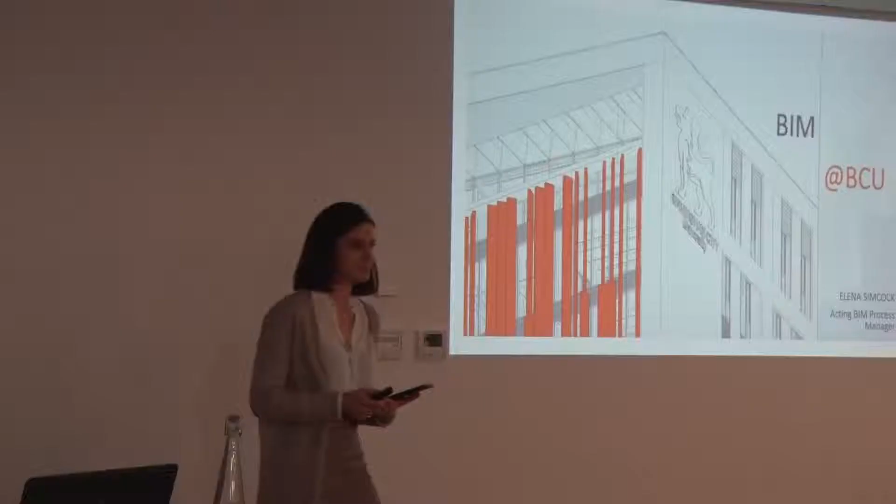Today to teach you a little bit about our university. I have been with Birmingham City University since 2016, initially as a BIM assistant.

2018. And I'm also joined today by Chris Johnson from Willmott Dixon Construction. Chris has worked with us on our capital scheme, so he's really well familiar with our information requirements and will be able to give you a very good insight of what it takes to deliver those in the field.

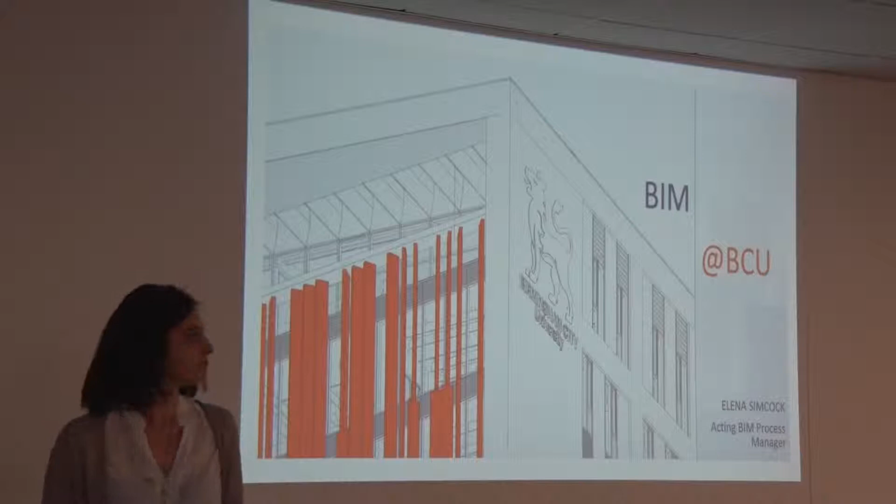Okay, so just to start off with a little bit of an introduction of our timeline, where we are and where it all started. So the university has been on its route to digitizing its construction and facilities management database since the mid-90s, with an early adoption of a reactive maintenance system, essentially a ticketing system. That was followed by compilation of 2D space data across the estate in 2004, and our first official BIM scheme opened in 2013, the Parkside building, which is the home of the Faculty of Arts, Design and Media.

What we consider to be the landmark of our development is the Curzon scheme, which was opened in 2015 and then later on extended with a phase 2 project by Willmott Dixon in 2017. So following the Curzon building, the university embarked on an intensive phase of development, working on 3 capital schemes simultaneously, delivering BIM on all 3, as well as a developer scheme, opening the doors to the Birmingham Conservatoire in 2017.

And as you can see on that timeline, we started quite early on in the process, and we have an extensive BIM database, and the process was still evolving, so British standards and documentation were still being developed as we were already working on our journey.

What we're working on now is Steam House 2, which is a building spread over 11,000 square meters, a mix of educational, commercial, and incubation space. Stage 3 of the project is about to kick in with a scanned survey, a 3D scanned survey of the Belmont Works factory facade, which was gutted by fire in 2007.

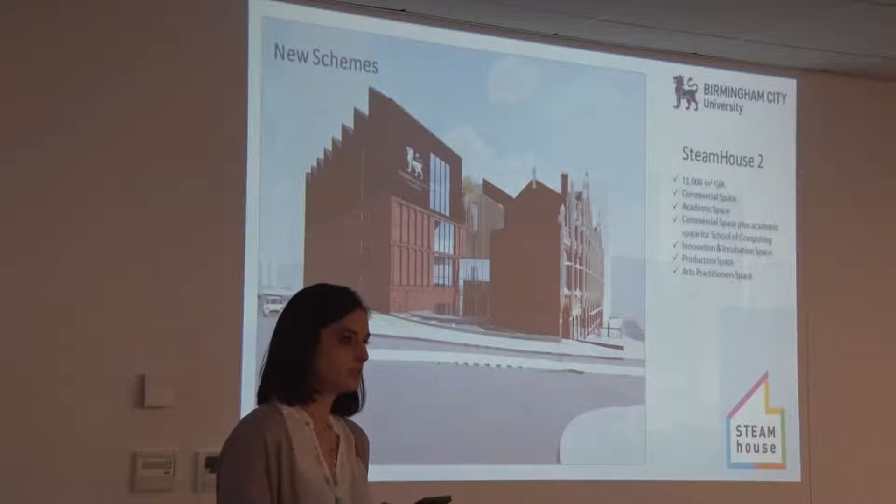We're focusing on the information delivery plan very strictly on this project, as well as roles and responsibilities to improve visibility and transparency. We have also got a new classification system that is now fully aligned to the SFG 20 maintenance standard, introduced by the Building Engineering Services Association.

So a little bit about why we do it. There are many reasons why we would want to build information modeling on our project. But above all, the university has a long-term interest in its facilities. As such, we're interested in the management of the whole life cycle of information. And we're interested to do this in a sustainable manner.

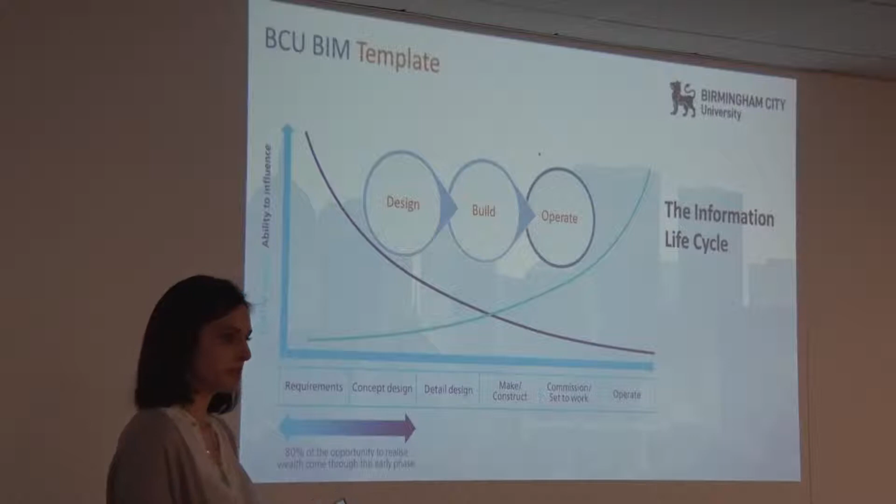We are interested to reduce the amount of information or the overproduction of information by sharing it centrally between the teams. We are also interested to reuse the same information that is used to design the buildings, to construct them, and then later on to operate them.

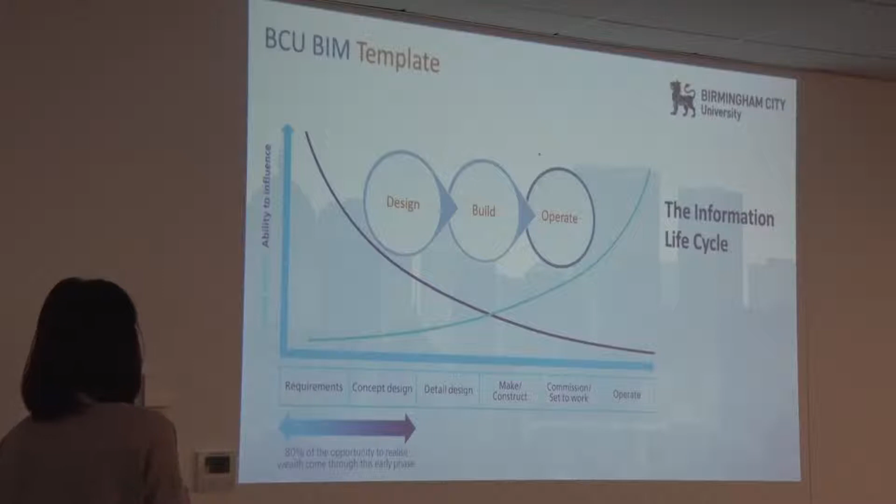And we are also interested in seeing that whole process being recycled during operations by reusing the same information and completing the cycle. And what we would like to really see is the ability to influence the design positively early in the process at minimum cost and with maximum impact.

So when talking about building information modeling, well, a building information model is a pretty complex model, and it consists of all kinds of data sets. In a way, we view building information modeling as a complex system that allows us to link different kinds of data sets, and a complex information system requires complex information requirements.

So looking at the building information model, a client needs to really think about what it is we would like to receive at the end of the job. Is it just a 3D model? How would you like your asset information to link to your 3D model? How would you like your drawings to link to the 3D model?

Well, what about testing and commissioning certificates and operational and O&M literature and documentation?

Then we look at the second aspect of building information modeling, the how question, the modeling question. How is all this information going to be produced to give us consistency between projects, but also accuracy throughout the database? This is by implementing a specific process that needs to be followed, and also following some standards. So we're now looking at the new ISO BIM standard and what elements of that would suit our template.

And the final aspect we need to consider is the management aspect of BIM. It really is taking responsibility about who is responsible to produce what kind of information and when.

So a complex information template needs quality controlling. It is a complex system, and setting out information requirements should only be done in a measurable way. There is little point setting out and asking for information if you're not able to verify that information. Bad information is worse than no information at all, and it may be the case that a spreadsheet is better than a complex, poor quality BIM model.

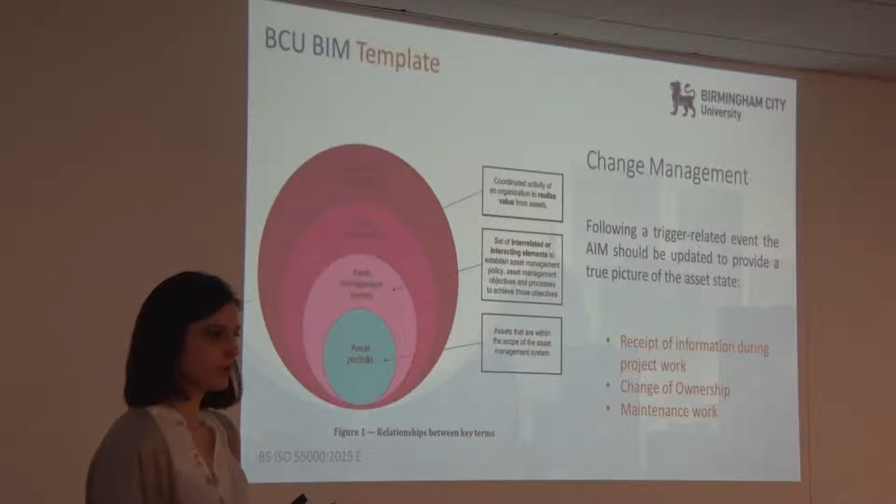Another aspect we need to focus on, touched briefly by Hadir, is change management. There is little point working on receiving rich BIM information if that information is not going to be maintained during operation, and there are many challenges with this. It is something I have been focusing on in the last 6 months in particular. An asset portfolio is at the heart of any quality facilities management template, so it is essential to maintain it during operation.

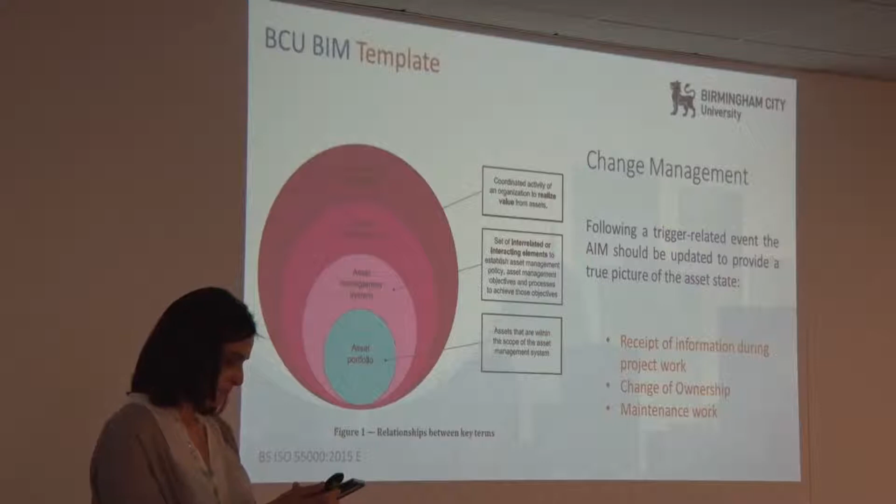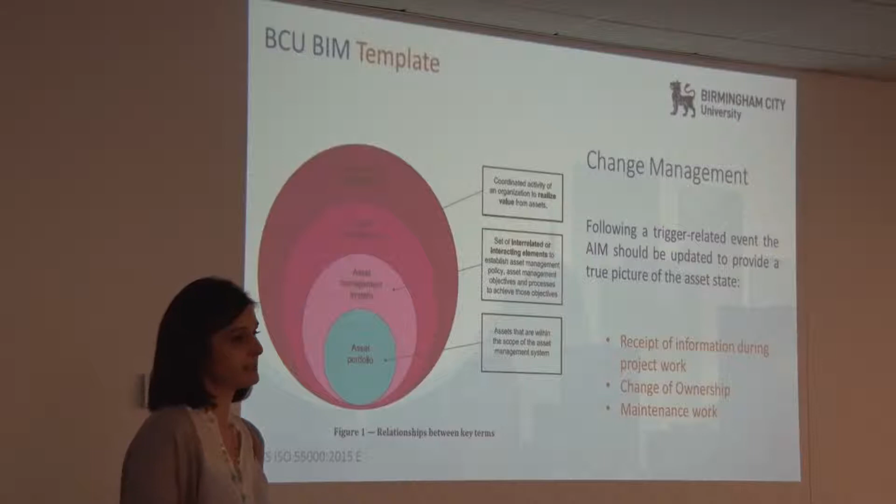So the way we do this is by making our models available centrally on the cloud to be accessed by delivery teams. We use our teams to update our models whenever we do a refurbishment, but the models are not necessarily used to drive change. Our teams would always go and measure on site. What is essential to us is to maintain a quality database that is reliable at any one stage of a project.

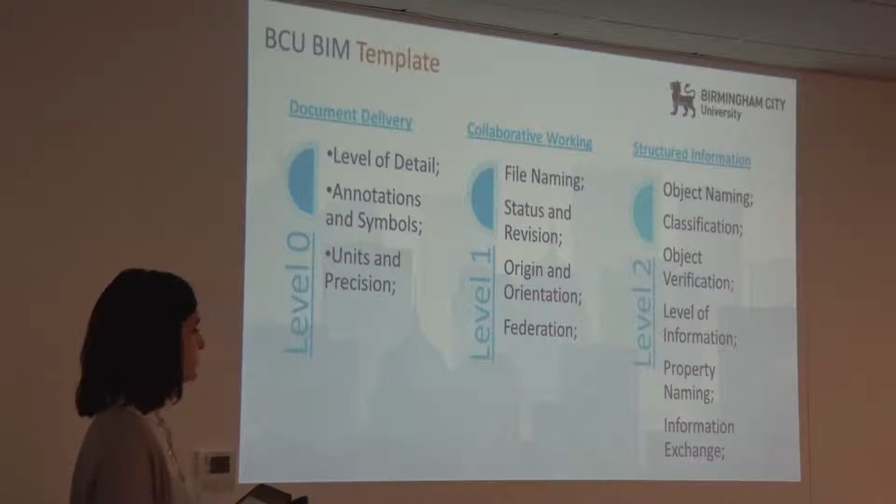So just a brief pause to introspect here. We've heard talks about BIM levels and what they are, and pretty complex templates. But what we really need to focus on is what those templates are aiming to deliver. Focus on the outcomes at the start.

I'm pleased to say my understanding is that the new ISO standard does not reference anything similar to BIM level 0, so the industry has matured. We're now broadly working at BIM level 1, where we're able to work collaboratively and share information, and we're really moving forward towards BIM level 2, which is to deliver that information in a structured and meaningful way.

Just to finish this part of my presentation, I recently did a comparison chart of where we are in terms of the industry standard and how we differ. Although we are very broadly along the lines of BIM level 2, because we started our BIM development so early in the process, before the standard was well established, our template does differ from the industry standard, and there are small changes.

We require native design files, so we receive our information as Revit files. Our drawings are limited to those files so that we can maintain them easily during operation. We use NRM3, which is not the ISO implementation of a classification system in the UK, but we find it really helpful when we get that data into facilities management.

Yes, we use SharePoint as well to store our information, with a combination of BIM360 to store graphical data.

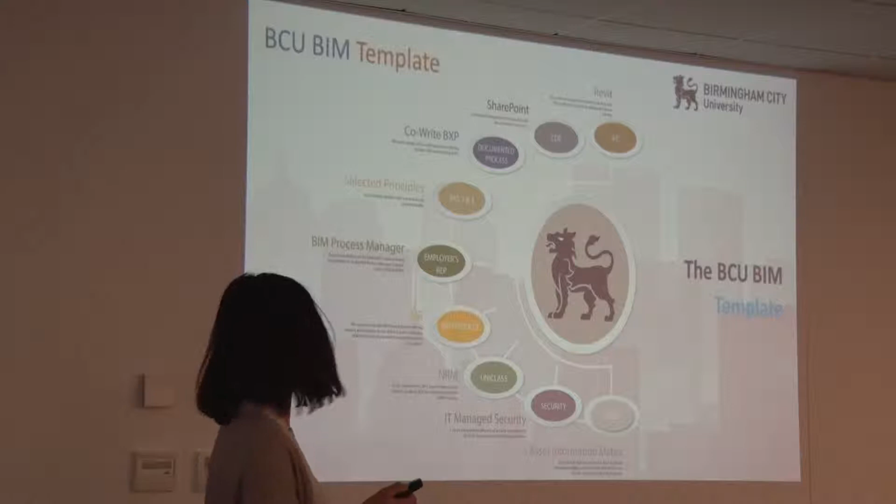Having completed five capital schemes and receiving a lot of rich BIM data, the university did not have a computer-aided facilities management system. So last year we procured Concept Evolution, which is a BIM-compatible platform.

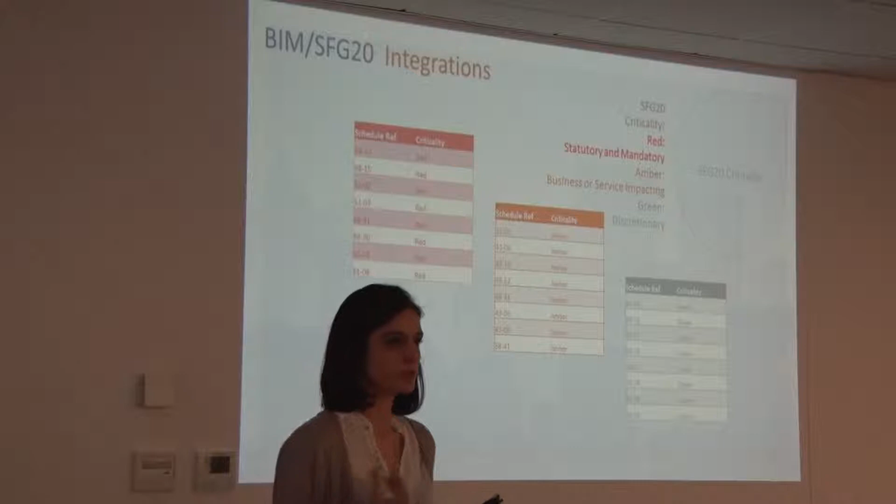Integrating and rationalizing our data has been a big challenge for us and has taken a lot of our time. When talking about integrations, we have to demonstrate that we are compliant as a client in terms of plant preventative maintenance, and the university uses the SFG20 standard, which you may be familiar with. Very broadly, those are plant preventative maintenance schedules grouped based on criticality, with the red schedules being those we need to comply with to demonstrate compliance. There are other schedules that have an impact on business and service, and some are discretionary.

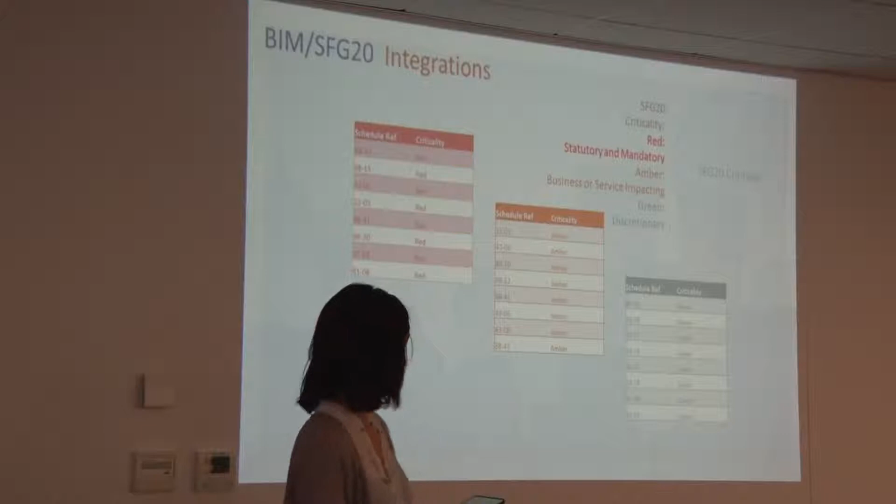Part of our integrations and taking our BIM data from the models into CAFM required aligning with the SFG20 standard, and the way we achieve this is by using NRM3.

Very broadly, NRM3 is structured in levels. At level 1 we see groups of elements. Moving on to level 2, we see building elements, which are then broken down into their systems, and components and specification at level 4 and 5.

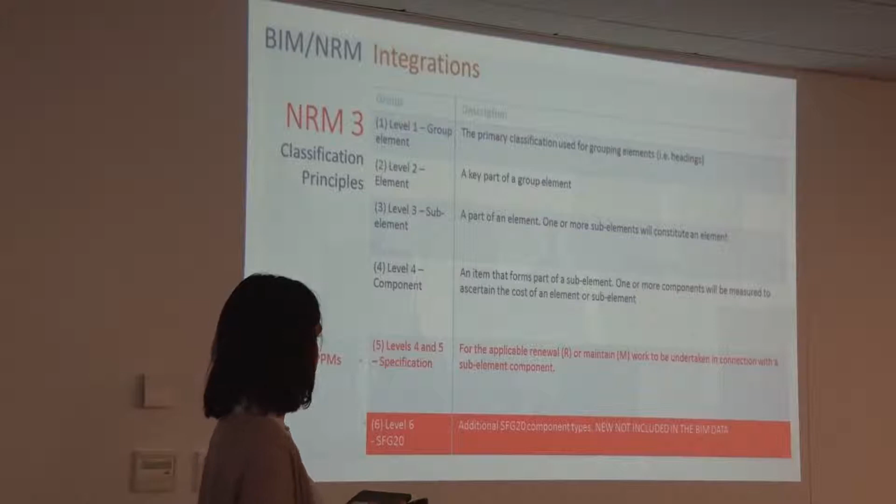What we did recently is extend our classification table to NRM level 6, which was introduced by BESA. BESA aligned their SFG20 data to NRM, and found that the classification system needs to extend further to pick the right PPMs for our assets. So we revised our NRM tables in order to comply with it.

Looking at integrations, our priority was to create a digital twin of our BIM data that we can take from our native design files into our computer-aided facilities management system, and exchange data between the two bidirectionally, so we can maintain designer information in the design models and facilities management information in the CAFM system.

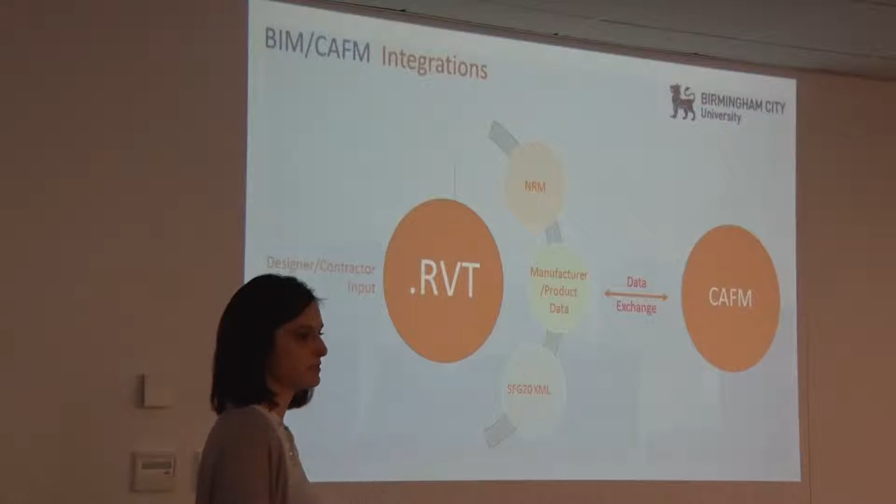When talking about information, we talk about NRM in terms of classification and how we group our objects to be meaningful to our operational teams, and also a lot of manufacturer literature that comes from our Revit files. All of that is linked to the SFG20 XML, which also goes into the Concept FSI.

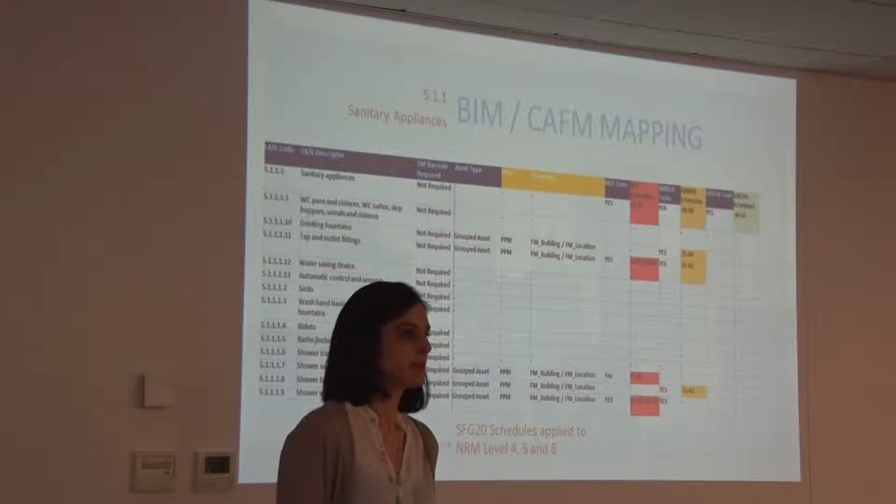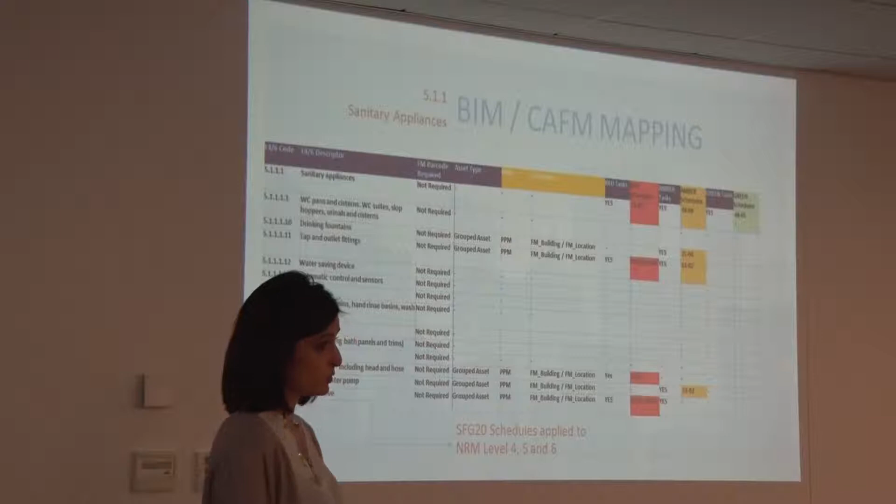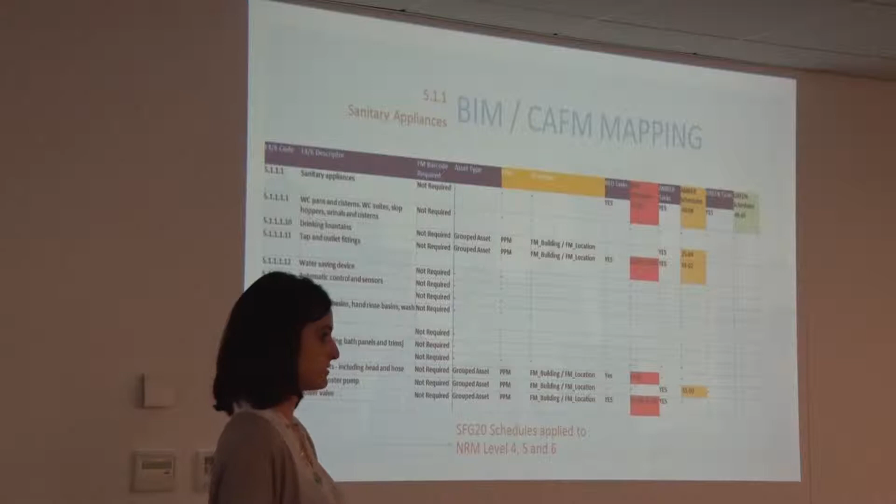I worked closely with our operational teams in creating a CAFM mapping template to help us get our assets into Concept in a meaningful way and cut out all the junk that can come from a BIM model. We used NRM to specify our asset types and identified 4 types: grouped assets using model data such as location, distribution board number, fire rating, etc., depending on how engineering would like to maintain the buildings; individual assets, if an asset needs to be listed individually regardless of other criteria; and parent and child assets. We went through the complete NRM table, classified our assets, and linked that to SFG20 scheduling.

We started with our Curzon building, and Chris will talk about that later. We were able to take our asset information from the models and run a dry test for our CAFM integration, to see how this data starts to shape up and make sense in a meaningful way. We can see the grouped assets identified in one of our buildings, the number of model objects, the locations they're spread on, and the NRM categories they belong to.

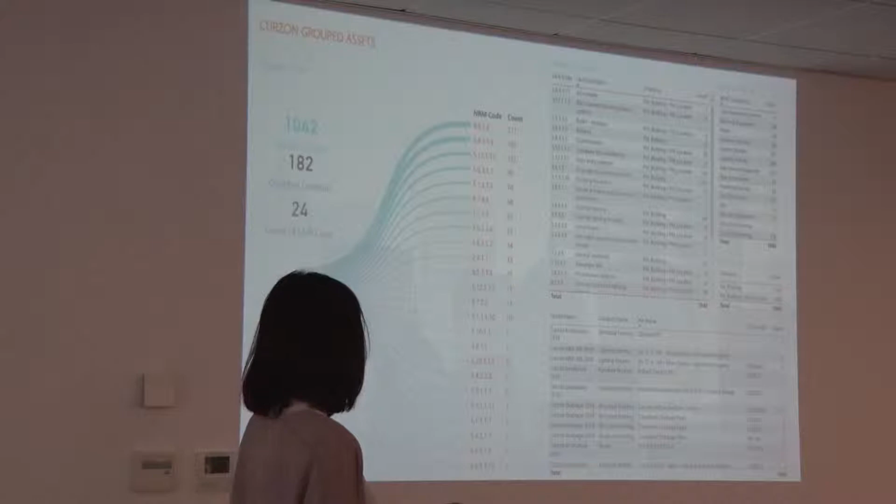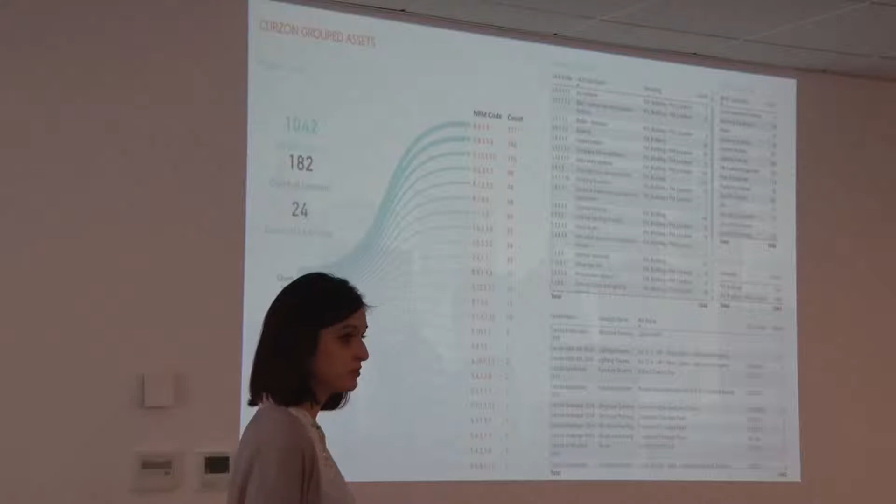We can see where these assets are coming from, what they are, and a lot of operational data associated with them. We can start heat mapping our information as we add our buildings and look at the different systems that come from our models and how those compare from one building to the next.

Our aspiration is to be able to link our data to our BMS, as well as energy consumption data and our sustainability criteria. We can do so by location as well, and start really studying and understanding our buildings.

Before I hand over to Chris, I'll leave you with this diagram. This is the story of our current building, and it illustrates how we use classification to demonstrate what we need to maintain for compliance. What we can see here is NRM level 1 objects - building fabric, services, externals, finishes, furniture, fitting and equipment - the rough categories, broken down into their systems at NRM level 3, and then going into sub-component and specification at level 4 or 5.

All those assets at the top are not assets we're interested in for planned preventative maintenance. We'd still like to know what they are so we can understand our buildings, but what we really need to focus on is the maintainable assets at the bottom, and that's how we use classification and our model data to help us achieve this. I'll hand over to Chris.

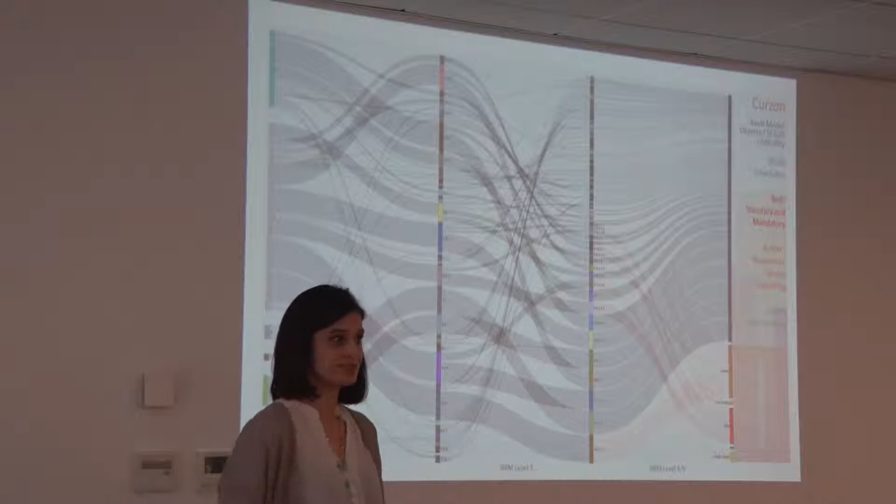Thank you very much, Ali. I'm here today to give a short case study on delivering these requirements across several projects, and some of the lessons we learned throughout developing these deliverables on 3 projects. My name's Chris Johnson, I'm Digital Manager for Willmott Dixon Construction, heading up the digital team across our Midlands region.

As a company, if you're not familiar with Willmott Dixon, we are a £1.5 billion turnover main contractor, and we have passionately embraced BIM. We've mandated it across all our projects in our region, and we're really trying to upskill our business to become a digital business for the future.

A very quick, brief introduction to the projects. We started off working with Birmingham City University back in 2012 on the Parkside building. It was very early back then - I don't think PAS 1192 Part 2 had even been released at that stage, so the team had developed their own standards. Interestingly, those standards closely matched the principles being done in the PAS, but some details weren't using quite the same classification systems.

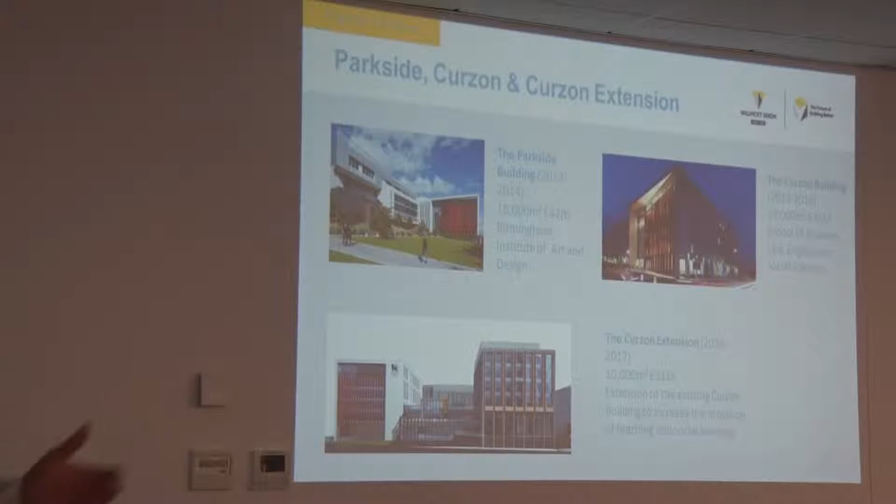All these projects were 2-stage tenders. We were then awarded the Curzon building in 2014, which is quite a large facility - a £46 million facility. Then in 2016 we were awarded the extension for Curzon there.

Right at the very beginning, we first started working with consultants together in a 3D modelling environment. What's absolutely commonplace now on a lot of projects wasn't happening commonplace back then. But there were a lot of advantages to having all your consultants working in a 3D modelling environment - quickly realising where there potentially are errors in that design right from the start, and designing around the other consultants' information, saving a lot of reworking. We get better coordination, but there is a bit of an impact, and I suppose we're only really starting to understand it now.

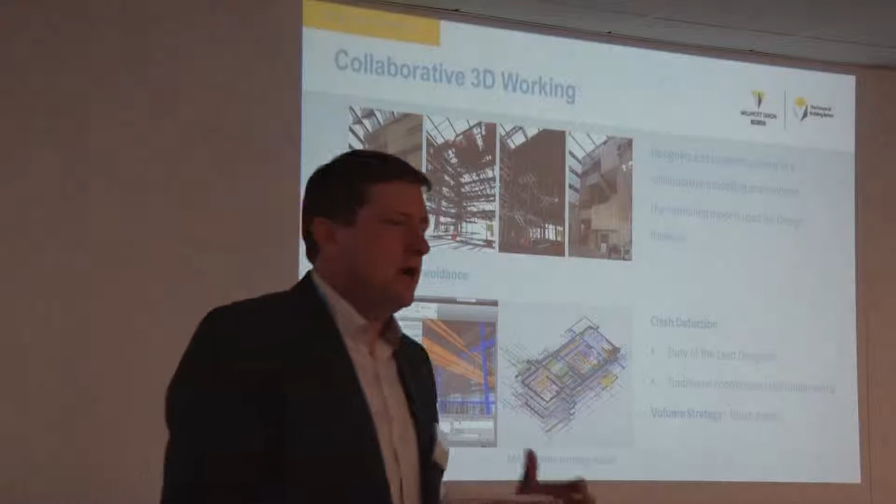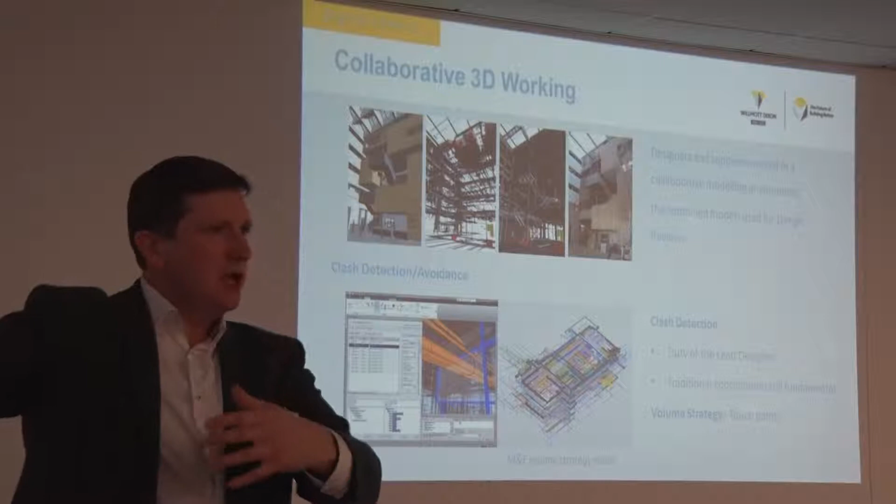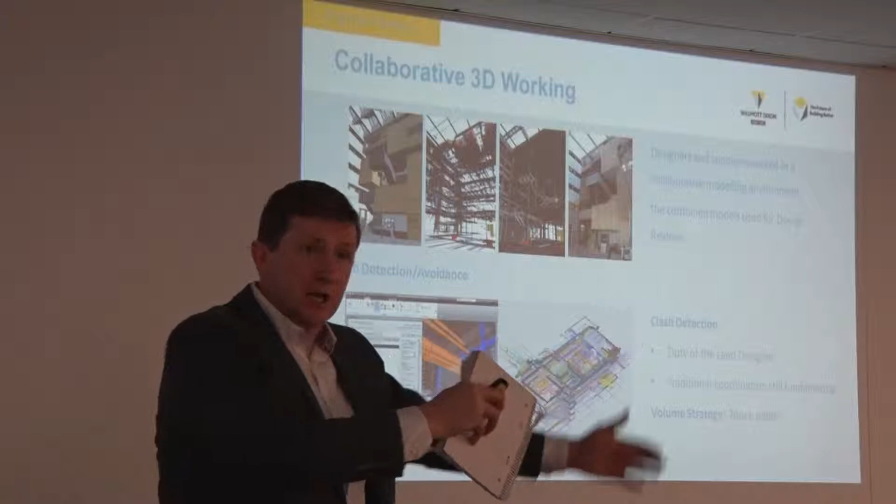By working in a 3D modelling environment, you realise very early on when another consultant's design is going to have an issue. So all those potential problems that would come out of the woodwork later on, maybe during construction, get resolved at the front end of the process. It pushes a lot of the workload profile for the designers further forward. Work they used to do during stage 4 into stage 5 is now being done earlier in stage 3. It's fantastic for us as a main contractor because we get more robust information for pricing, but for a client, you may have to invest more at risk before going out to planning. So it's worthwhile being aware of that.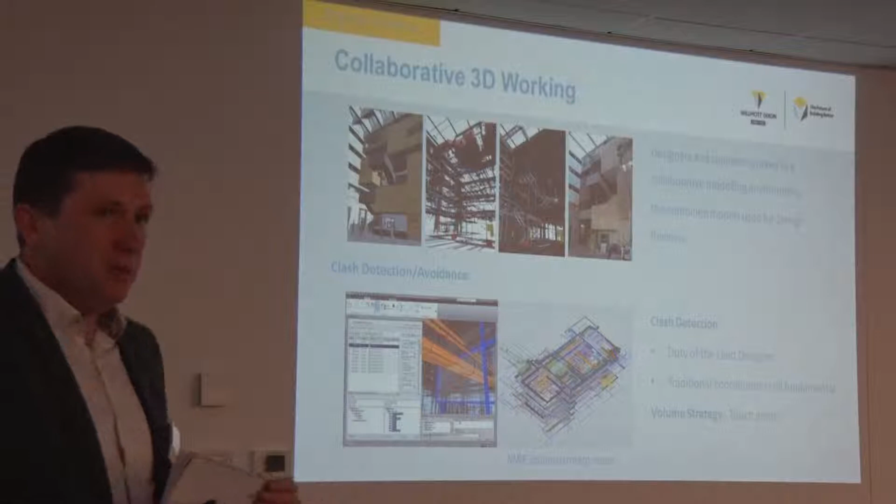Something we tried very early on, on the first phase back in the Parkside building, was that once you've got all your models together, you can start doing clash detection and automate the process of identifying where there are issues. The first time we did it, we were a bit naive. We threw all the models together and clashed everything against everything. We ended up with 50,000 clashes on our project. We couldn't even open the clash file. It was a major headache.

We very quickly became aware that traditional coordination processes still need to be done on a project. Clash detection and automated processes don't replace the traditional processes that a lead designer and design managers do. It just captures those things that used to occasionally slip through, so we end up with a better set of design information on site for construction.

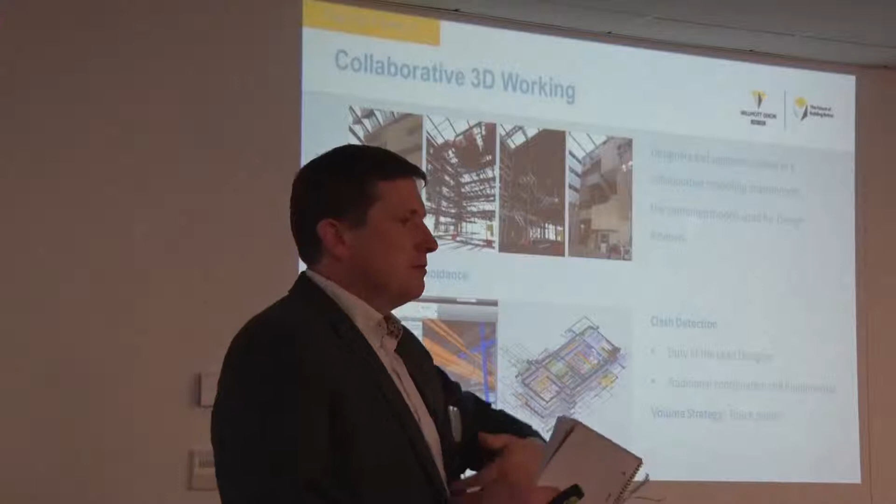The other thing we tried very early on, and haven't really done too much since but are starting to look at more, is clash avoidance. Rather than getting to a point where clash detection is very reactive—you design something and clash it against something else and then know there's an issue—with clash avoidance the idea is setting out a strategy right at the start of a project, allowing spaces for people to design within.

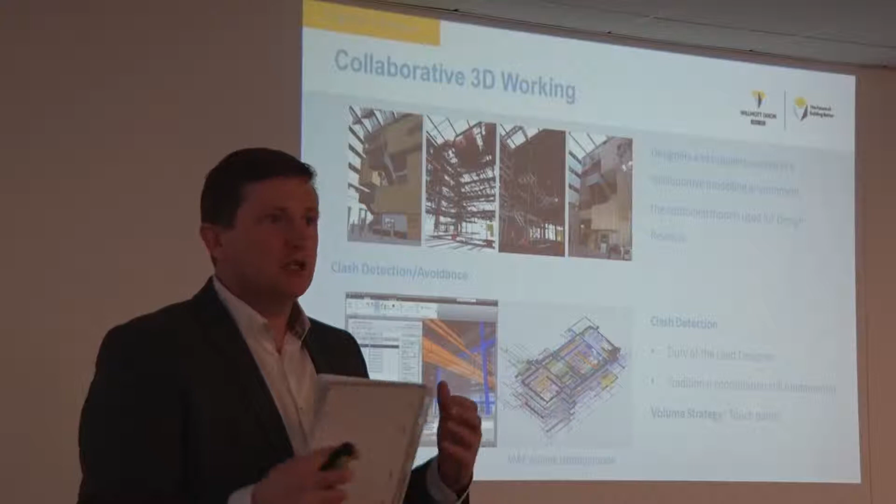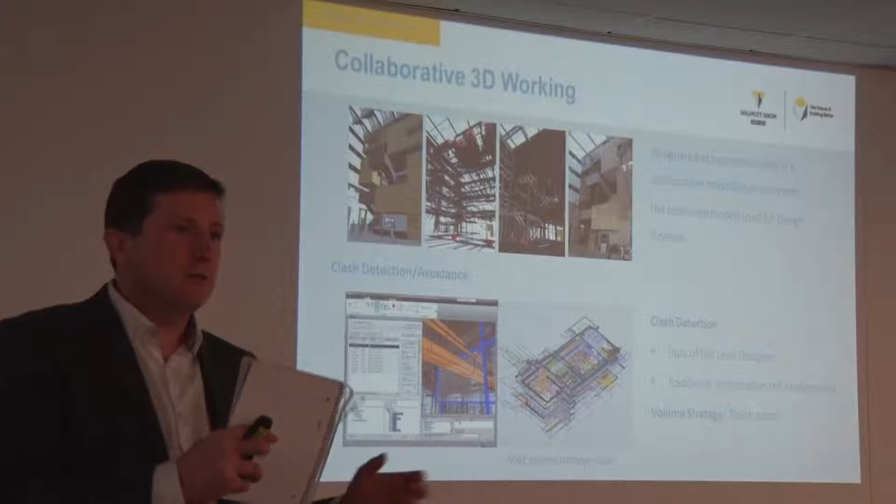So that they can avoid clashes right from the outset. We actually started it on the Parkside building—or the Curzon building, I think, I can't remember which one it was—but it's something we haven't really embraced as a wider business, though there were a lot of lessons we could have taken from that job. The idea is you give a zone for M&E services, and whenever a steel or something like that goes through that zone, it's very quick and easy to pick up as a potential issue. So you're giving spaces for people to design within. It's actually come out of the automotive industry, and it's been in the British standards, but nobody seems to be doing it on our projects. It's something we still need to look at and spend more time working on.

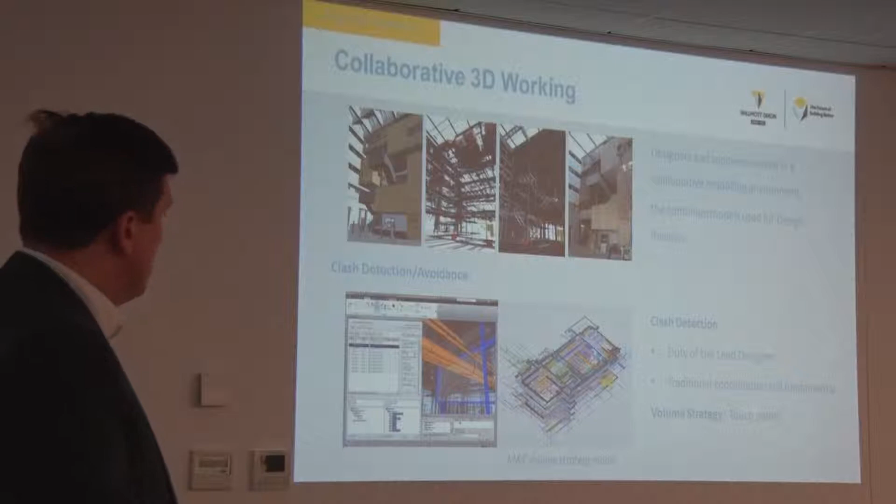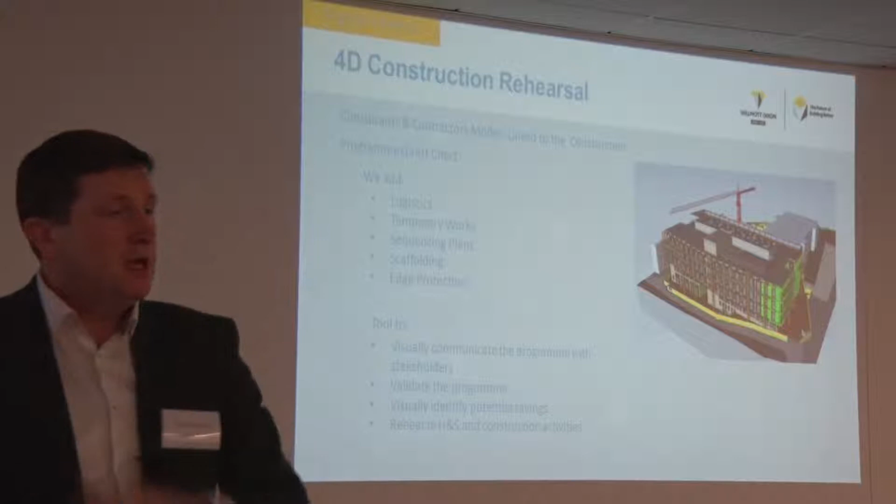Once we've got those 3D models from the consultants, we can pass them over to our construction team and use them to better inform our processes about that project. We take the consultants' models, add our logistics models and temporary works and so on, and link that to a Gantt chart. We simply take the objects, link them to the tasks in the program, and play through that program—it acts almost like an audit.

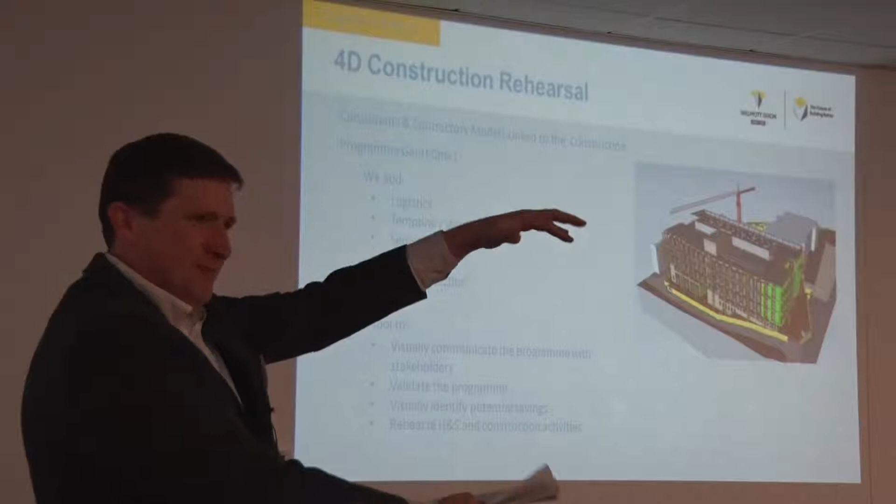If you've got a lot of objects left over after assigning them to your program, you know you've missed a lot of tasks out. Or when you go through the actual construction simulation, you can quickly see that doesn't make sense—like a ground floor slab going in after the columns are already up. Those things that may not be easily evident in a very large program with tasks are much more easily seen in the context of a construction simulation.

Now we've actually been using it as more than just a communication tool. We're starting to use it as a rehearsal of the construction program.

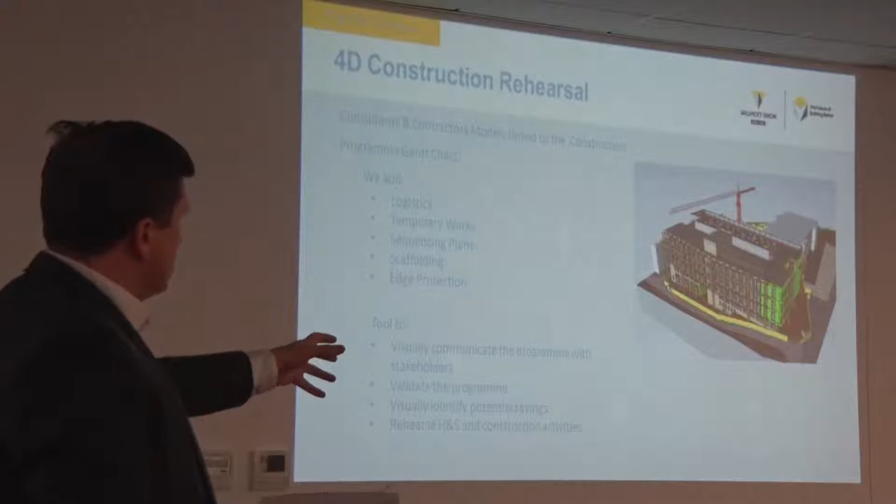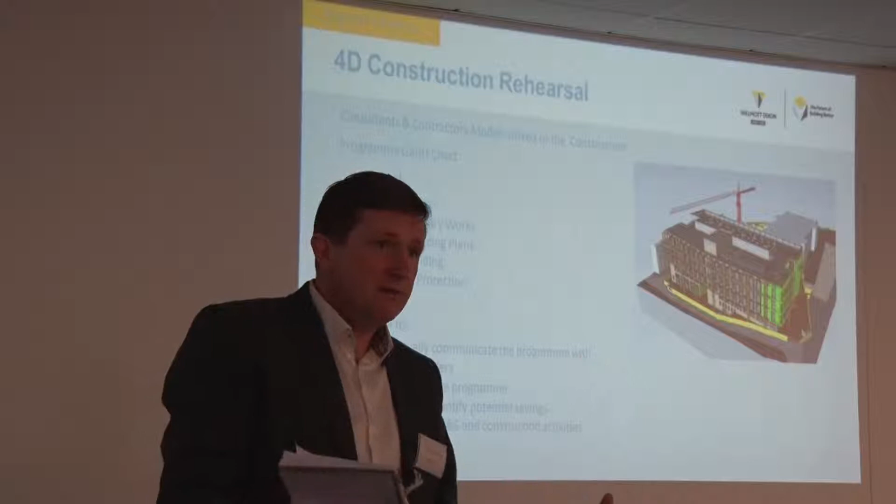Taking a construction manager, sitting in with them, going through this construction rehearsal, task by task, talking about the activities happening on that task, and they can very quickly see all the context of all the other activities and potentially unconsidered things or health and safety considerations, etc. So we're starting to use this rather than a construction simulation as a construction rehearsal tool, and it's really useful for that.

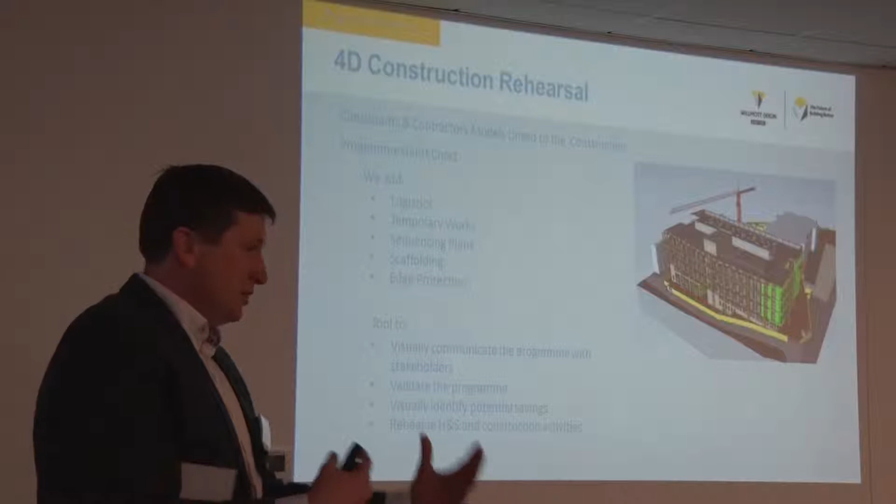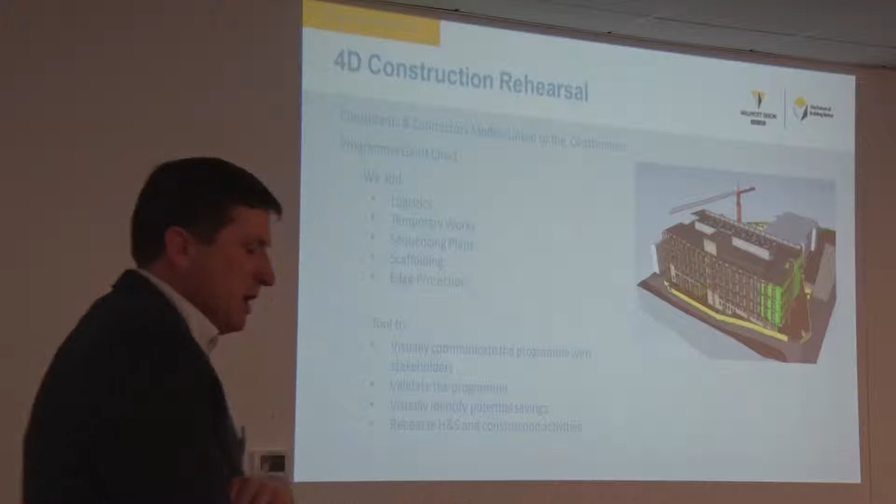So for some of the things that come out of the woodwork, on the phase 2A or the Curzon extension, we had mast climbers going up, scaffolding going round, and very quickly we could see - it was very visually evident what wasn't evident in plans. At certain points in that program, it was going to clash with the scaffolding and those mast climbers weren't going to work. So we had to quickly come up with a new strategy. It's those kind of things that come out with that rehearsal.

Now, this was an interesting point - after we handed over, I'm just going to look at a couple of key things here today because it's a very short case study.

One thing that came out of handing over the first phase of the BIM information to the Birmingham City University estate team - one of the team members asked our senior design manager, how do I know it's correct? Which is a very good question, because Chris Kimman, our design manager, has been working on projects for 30 years, said well, I've never actually been asked that in the last 30 years.

So what happened on the second phase was that we were asked to undertake a point cloud scan to compare the actual install against the design intent. So we got an external company in, they did 2 scans - one of the structure, when the services, the above and below ground or below floor services were exposed, and then we did a second scan of the completed facility. We then overlaid them, went around and looked at a lot of different software that you could do comparisons with.

And we quickly came to the conclusion, at least at that stage, it was just as easy to do it visually - mark up where those potential variations were and send them back to the consultants to get them to update their information, to make sure we could get an accurate set of as-built drawings and an accurate as-built model. Because, as customers, you're going to be using these models for the next 50 years or for the lifetime of that facility, you'd want it to be accurate.

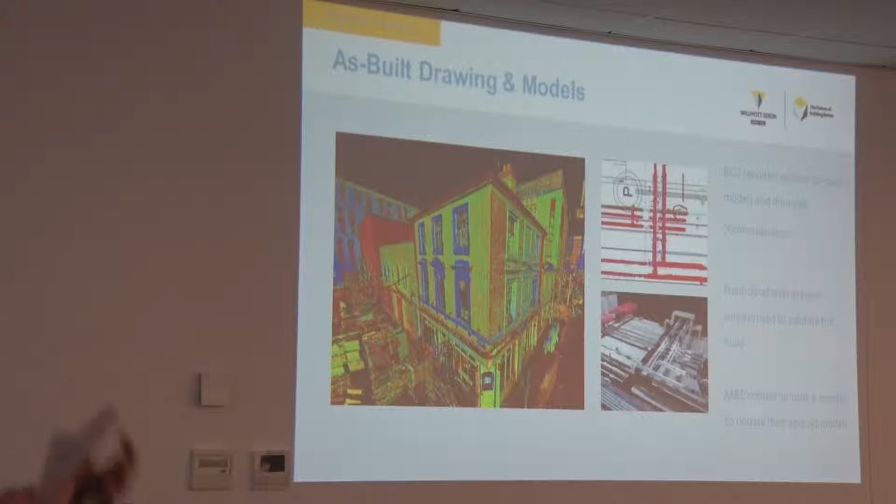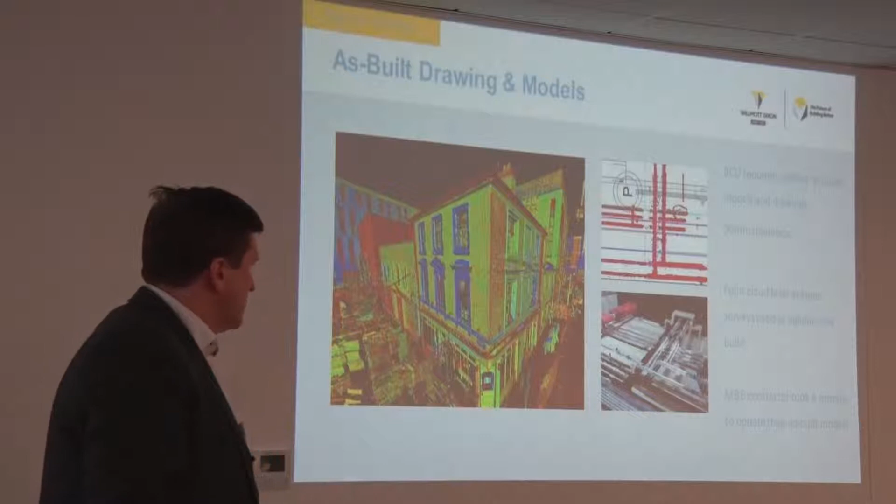Now, while we instructed the M&E main contractor, they of course also have tiers of subcontractors that work underneath them as well, and that message about having to build within up to a 50 millimetre tolerance had never got through to those lower tier contractors. So an interesting lesson, I suppose, for us.

So by the time that we got on to the third phase and also onto the extension, we'd spent quite a bit of money going out to a consultant to get those point clouds. In fact, it was as much money as buying a point cloud scanner ourselves, so we could start doing that process ourselves, having some of my digital engineers on site and start scanning as we go.

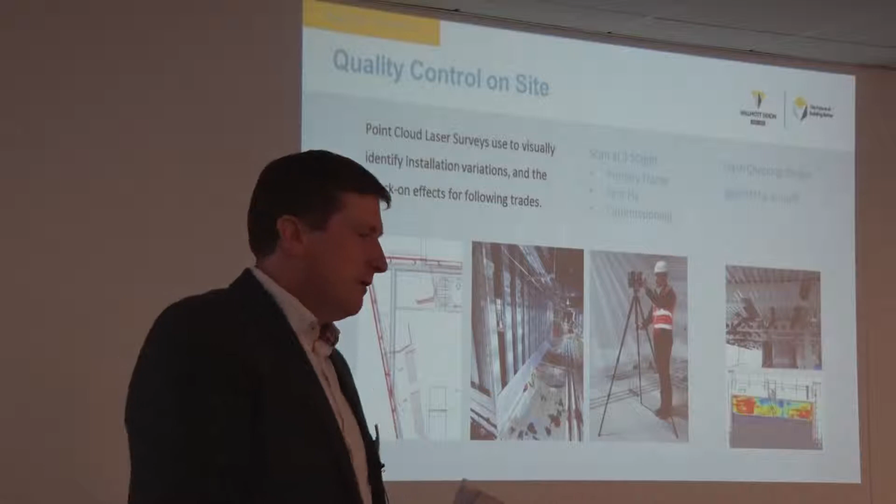Now, something we hadn't really occurred to us, but of course, scanning as you go allows us to then quality control our supply chain partners as they are doing the install. So, a partition will go through, we'd do a point cloud scan, drop it over the Revit model, and quickly see where there were variations and where there were problems.

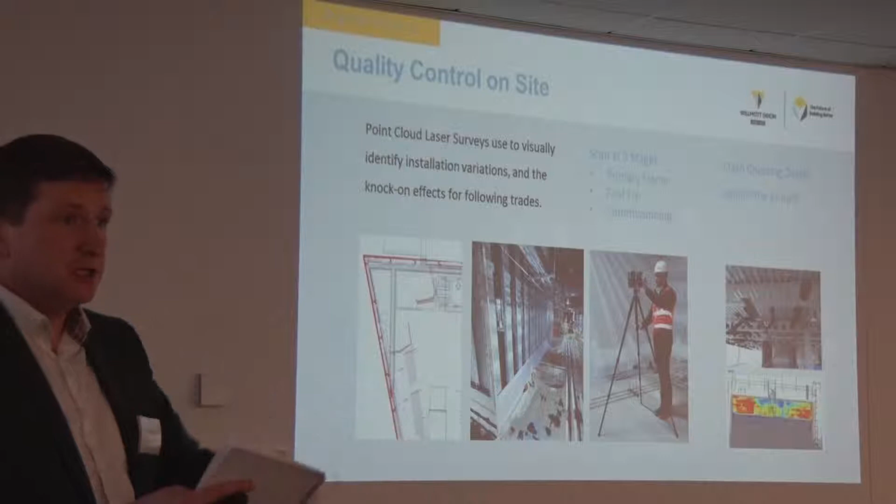We'd go back to the architect, associated architects. Where possible, they would incorporate them in the design and update the design information, reissue the drawings again for the following trades that were going to come along onto the job.

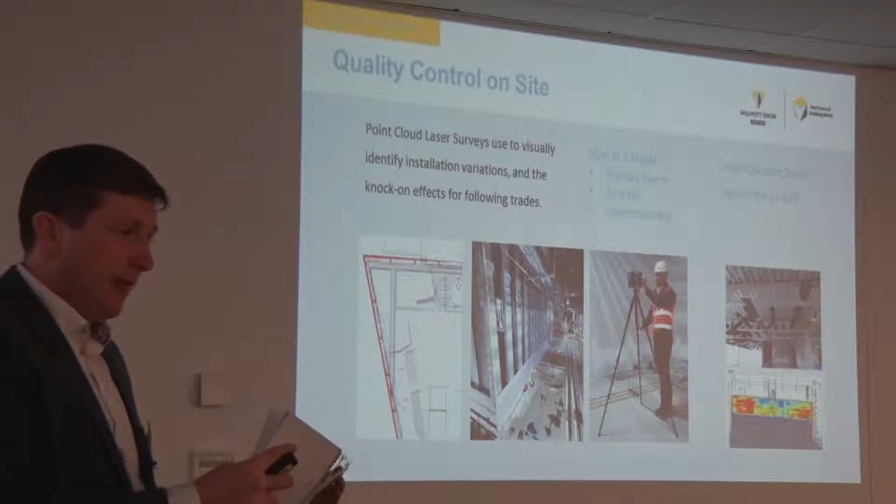Or if not, they'd tell us there was a problem and we'd go back to the supply chain partner and they'd update their works to correct it. So a really good example here, there was a partition that was out by 100 mil, but the problem was that there were some glazed screens coming through. They were already out for manufacture, so we were able to capture it and get this wall corrected before the glazed screens came to site. Otherwise we would have realised there had been a problem and we would have had to spend some time working it out.

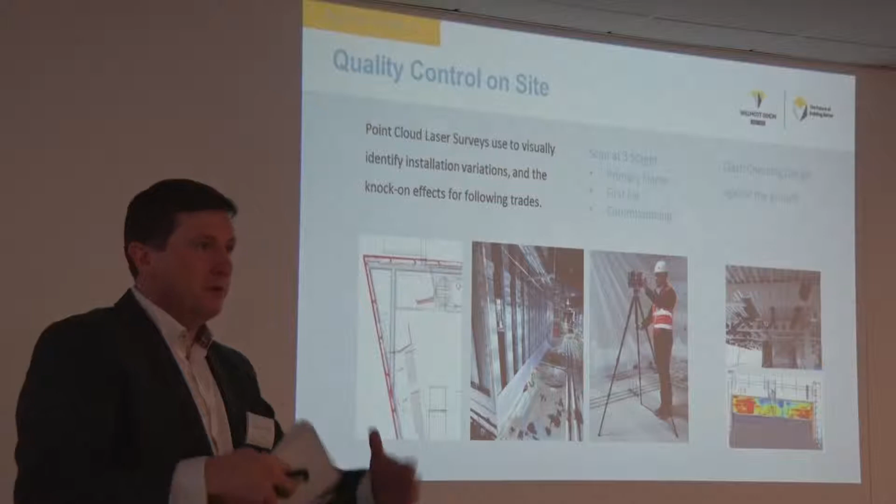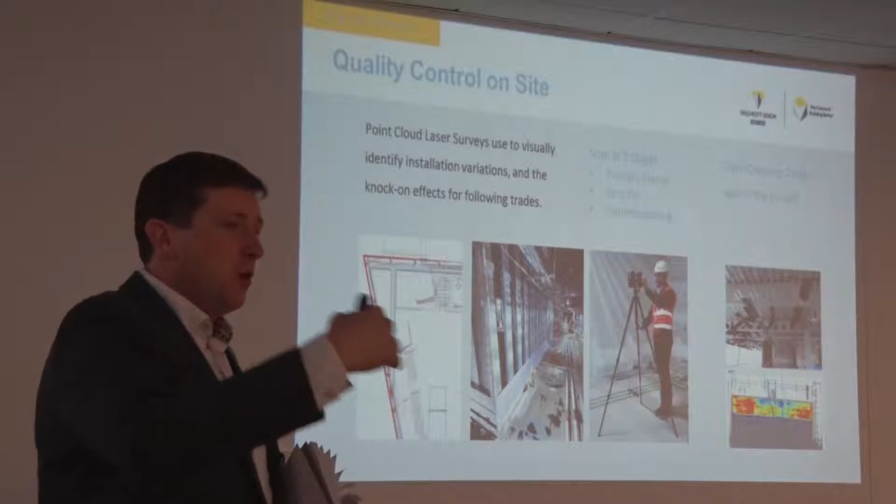So it gives everybody visibility into the quality of that design. It's a really, really useful tool, these point cloud scanners. It was my digital engineers who did it on this project and on our future projects, but I think this is going to be the way our site engineer role evolves, to become part of their standard role on a day-to-day basis.

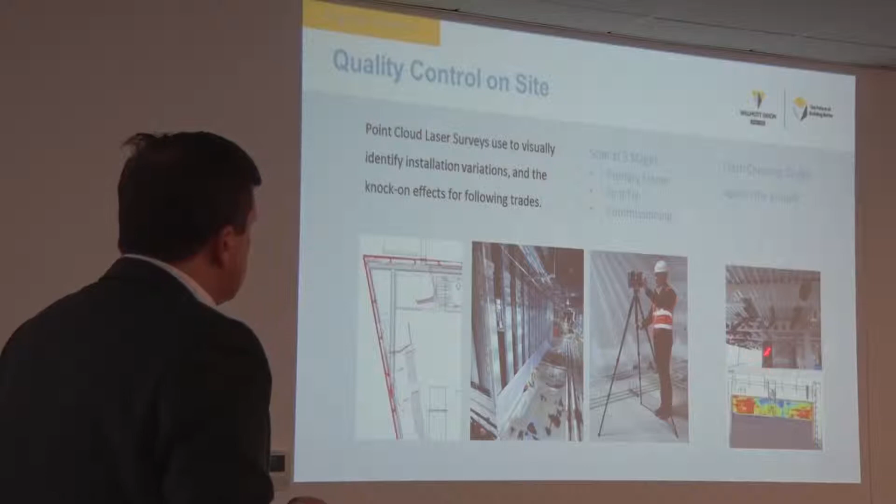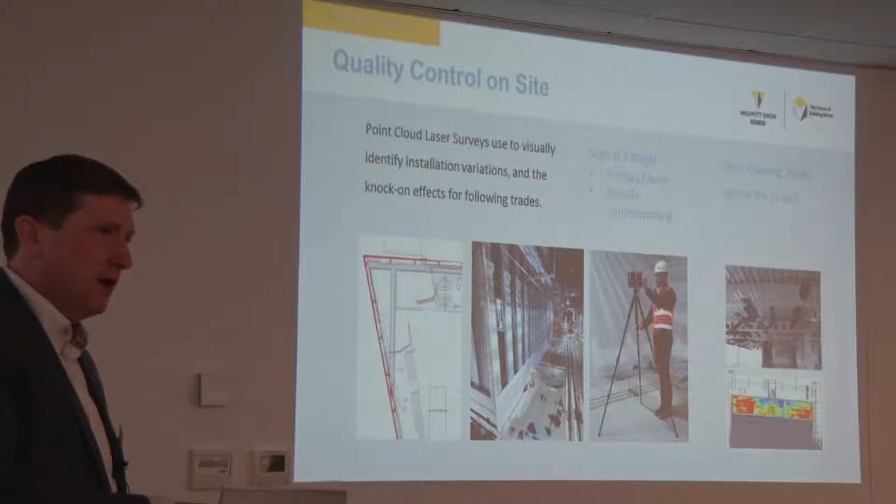Now, what we're starting to do now a bit is point cloud scans and then overlaying - and we need to credit one of our competitors for this - our mechanical electrical designs against what's actually there. So we'll do a point cloud scan after we've got the structure up, overlay the mechanical electrical design against that, and very quickly identify where there's going to be potential problems and get them sorted out before we encounter them on site. So it's a really, really useful tool.

Now, one of the customer's requirements right from the start was to get a facilities management model that was able to be used on a mobile device. That told us a really interesting vision here, and I think it's really valid, but we didn't quite comprehend what the use of this would be.

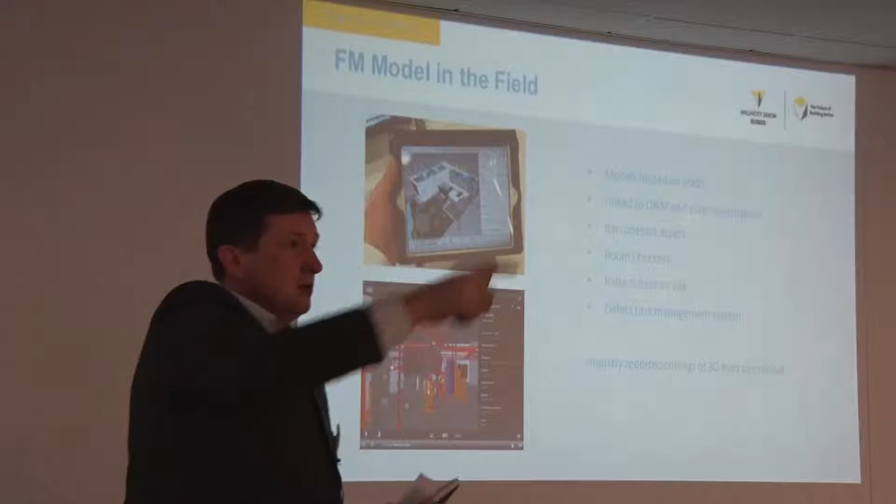But the idea is, if there was a leak in a room somewhere, for example say we've got a leak over there in the corner, the estate manager out on site - because we're talking about university estate buildings here, they could be occupied lecture theatres and things like that - can very quickly go out on site with their model, bring up their mobile device with the model, turn off maybe the ceiling, trace it back to where the valve is without having to actually do an investigation by lifting ceiling tiles throughout different rooms, interrupting lectures and things like that, and immediately find where they need to turn something off.

So having that mobile model, there's a really good case for having that facilities management model actually out on site.

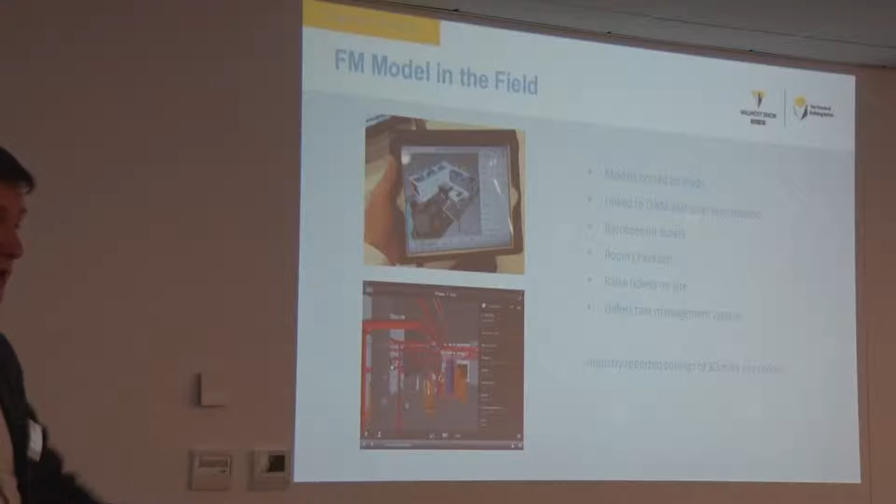We looked at a number of applications. Eventually, the estate team came back and said they wanted this application called Vela, which got bought in the meantime - by the time we actually went out to get it ourselves - by Autodesk, and became BIM 360 Field. While it's a construction task management platform, I hadn't appreciated that a lot of the things we do as main contractors out on site are almost identical to the things you do as facilities managers out in the field.

Going through checklists, making sure rooms are okay, finding issues, raising a ticket that we can go out to a supply chain partner to get something fixed. So a system like this can be a really good use of tool for management of that facility, having all the information available to the team out on site.

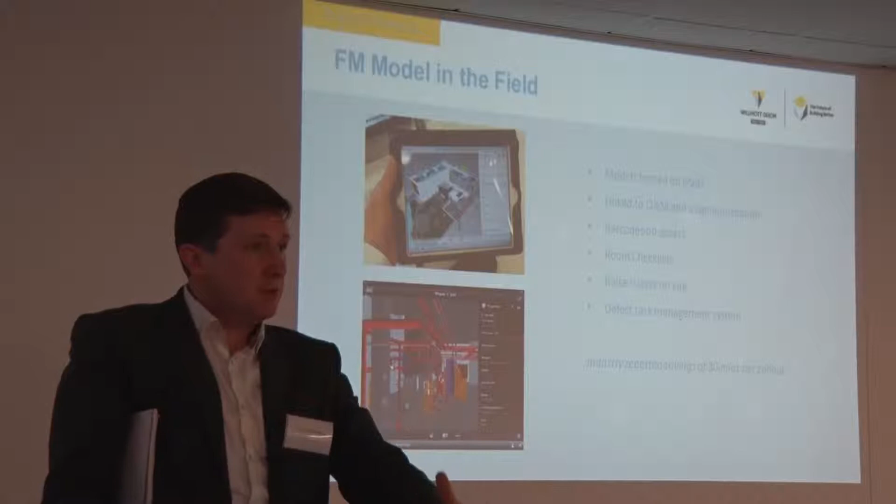So what we've done is put barcodes on the equipment on site, or barcodes on the doors. You scan that barcode, it takes you to that location in the model, you click on those items, and it will take you back to the estates team's operational maintenance manuals and all the information they have there. So it means the people on site can immediately get the information they need at that point.

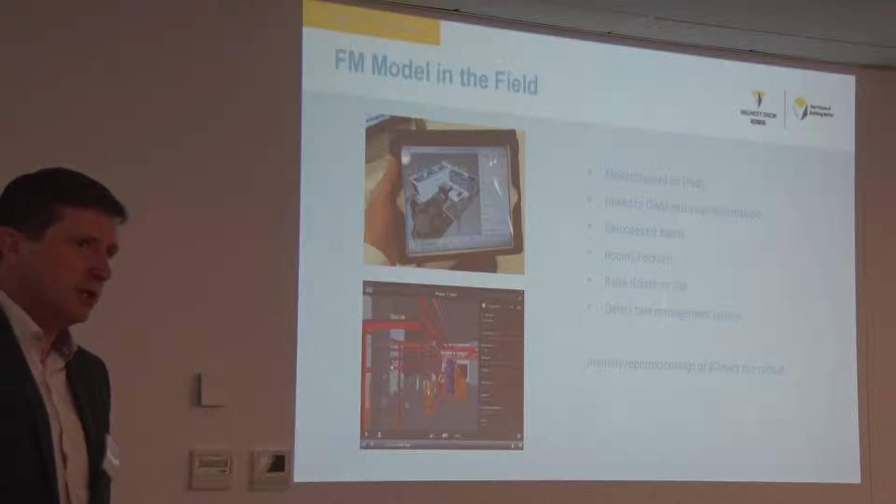Now, it's not us that has done this study, but one of our competitors who has a facilities management arm did a study and found that using applications like this was saving them 30 minutes per call out. So there's quite significant potential savings there in operations.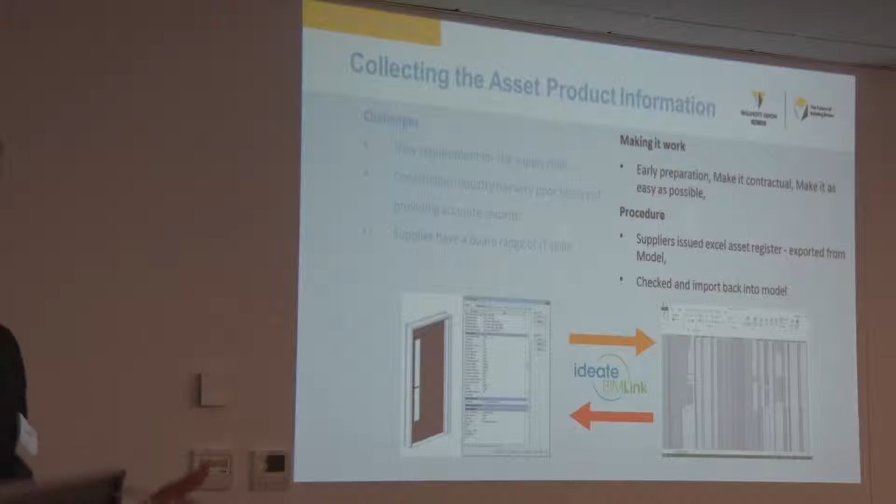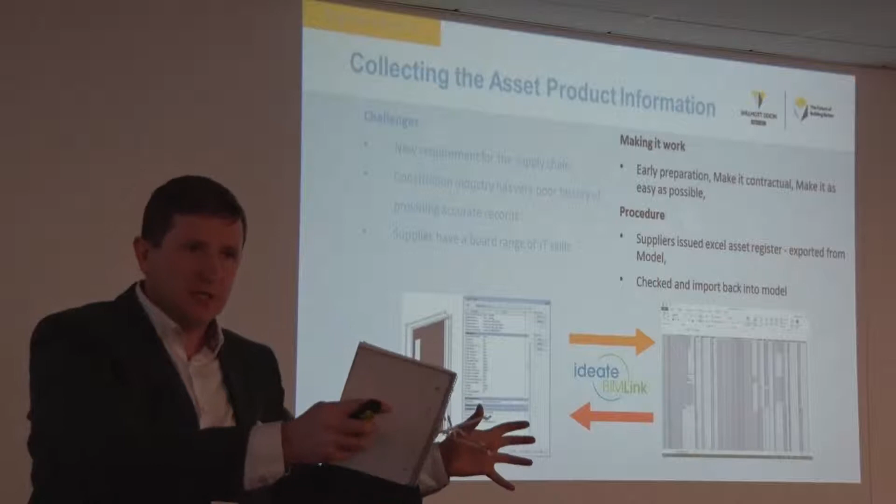I'm only going to talk about this very briefly, but this turned out to be quite simple once you know how to do it. This was the trickiest part about the whole process for us on phase one - how do we create an asset-rich information model full of information from our suppliers about all the products installed on site, and pull that into a model fit for the estate teams to help manage their information. What we found is actually it's quite simple.

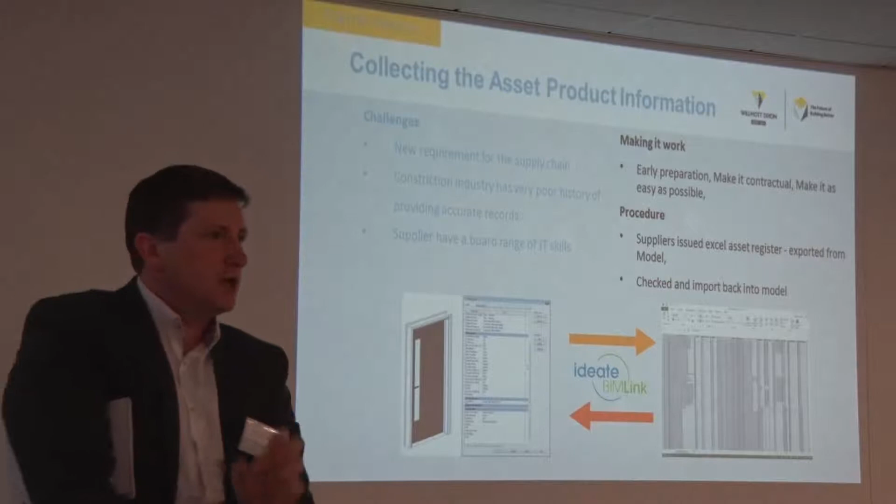We had to work through the process, but essentially we've taken a Revit model, export it out to a spreadsheet using an application called BIM Link. That's broken down into the work packages. At the front end of the Revit model, we set it up with all the parameters you require for your information - all the fields of information you need for managing or want about that equipment. That's maybe blank.

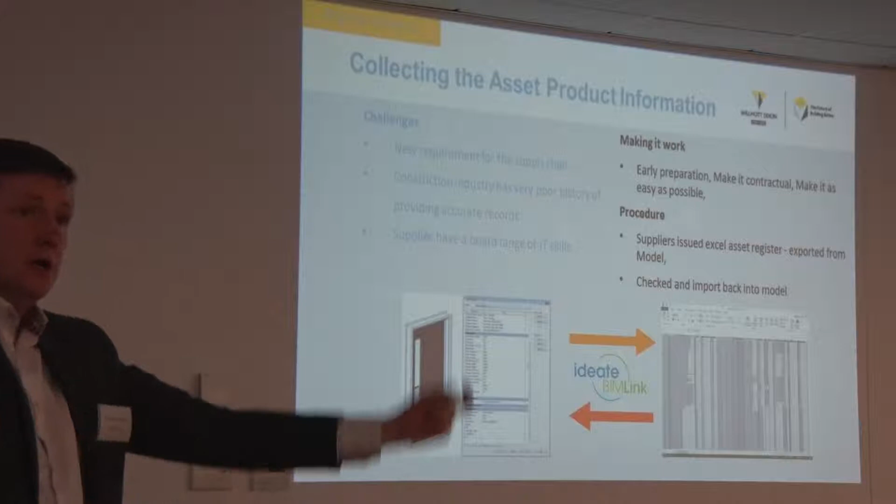We take that, export it out to Excel using BIM Link. We then give that out to our supply chain partners, broken up into the work packages, give them out a blank asset register. They complete that information, we then pull it back into the model using BIM Link, and it's as simple as that. We can then create a data-rich asset information model.

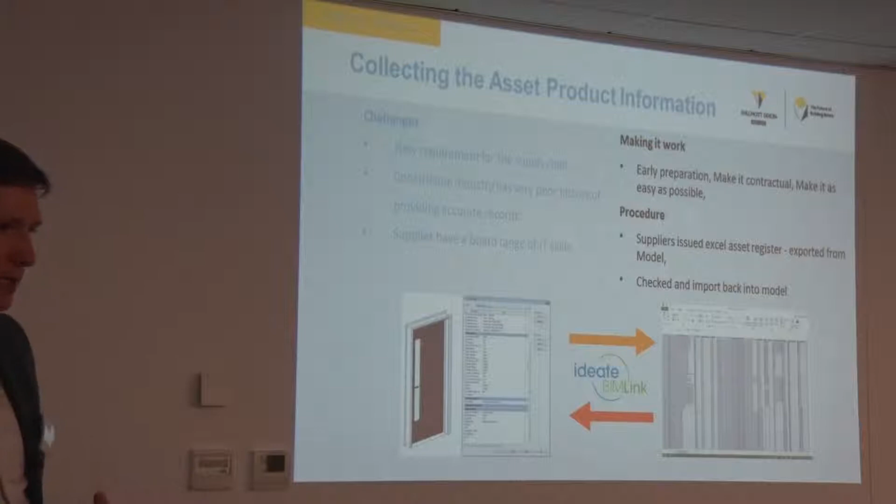The key things we need to be aware of: our supply chain, some are really good with IT, others have very limited skill sets when it comes to IT. Using all these different platforms we tested and tried, by far the easiest way - almost all of them could use Excel. So there was a massive advantage there, since they've often already been preparing information in Excel that was going into O&Ms, so it's just a natural process for them to provide us an Excel spreadsheet.

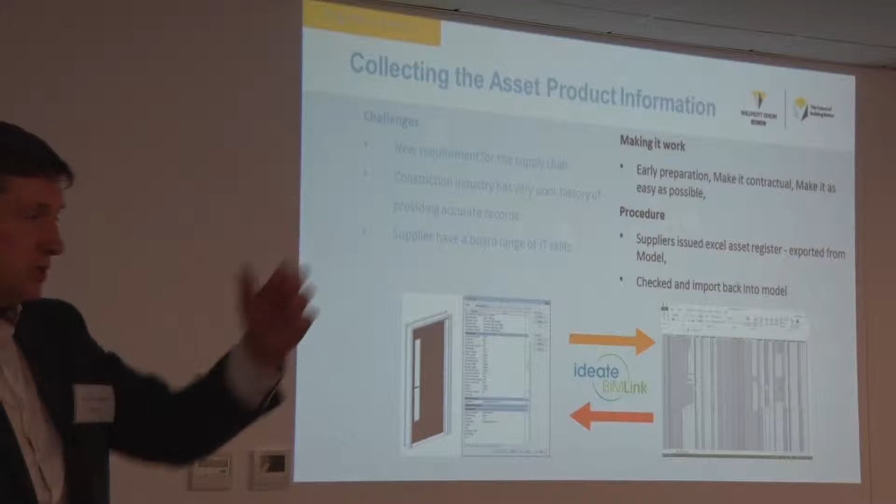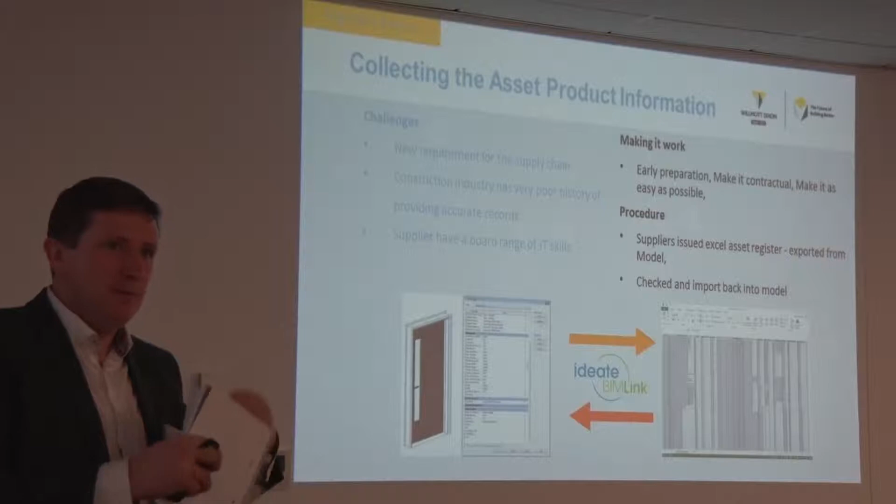You need to make it contractual if you're going to get it to work, because as a contractor, you don't have any leverage over your supply chain partner if they say no. So the first thing we learned is that you have to get this incorporated into those contracts, and we have to make it as easy as possible.

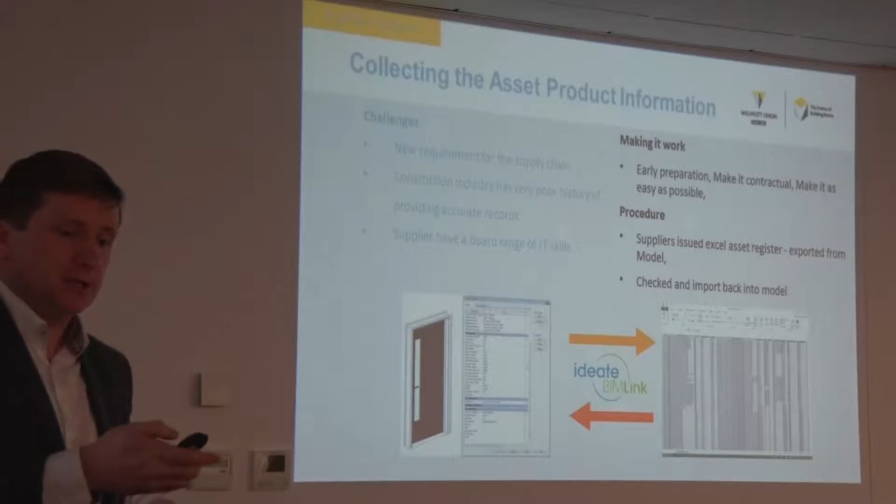When we got that information back, that's when my digital engineers go through, check it to make sure it's fit for purpose, and then we will hand it over to the customer at the end.

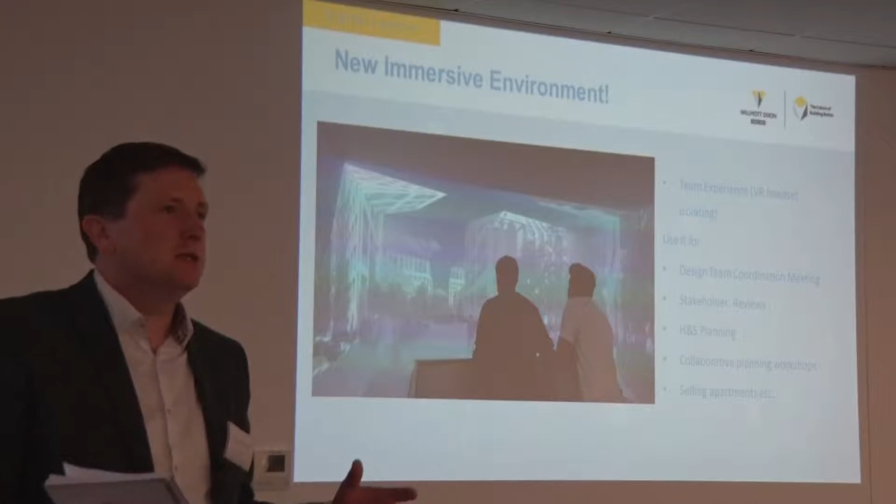The very last thing - what we started off in phase 2, I think it was phase 2A, we set up in the cabin a digital space where our supply chain partners could come in and review that model if they didn't have it, and walk through the model with our digital engineers to look at certain aspects or the construction simulation. We'd regularly have the cladders coming back in to look at certain difficult details and things like that.

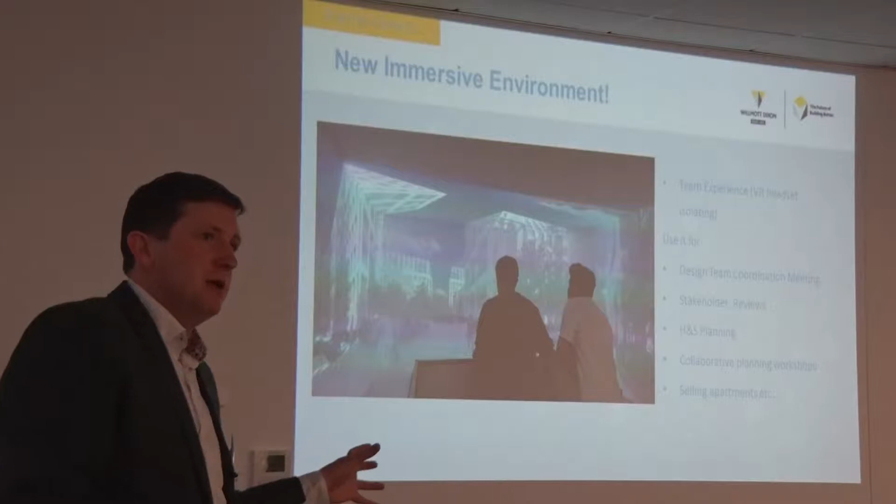Now we've developed this, taken it one step further, and we've set up an immersive environment in one of our offices where we can take customers through on every project at stage 3 or stage 4 and walk through that proposed design.

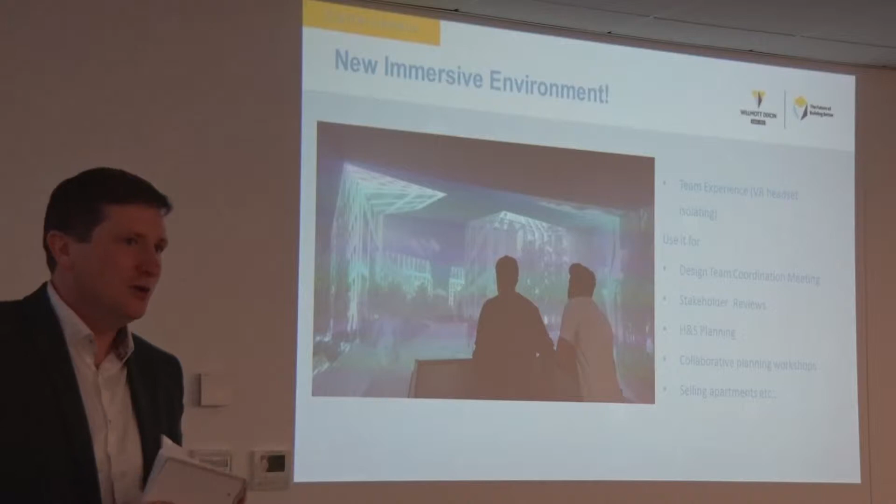It's very interesting because as customers you look at a design from a very different point of view than what we do. We've had customers come in, look at a quite well developed design, and simply ask, well, how am I going to change those lights? Nobody on our project teams asked that question. We can install it, but it's proven to be a really useful tool.

We recently took a customer through for a medium sized school. Everybody had been through those designs over and over again, but once we took them into this immersive environment and started walking them through that design proposal, they immediately found 5 different things that could potentially impact on the operation of that school. Because we took them through early enough, we were able to change and correct that design to get a better facility for that customer at the end.

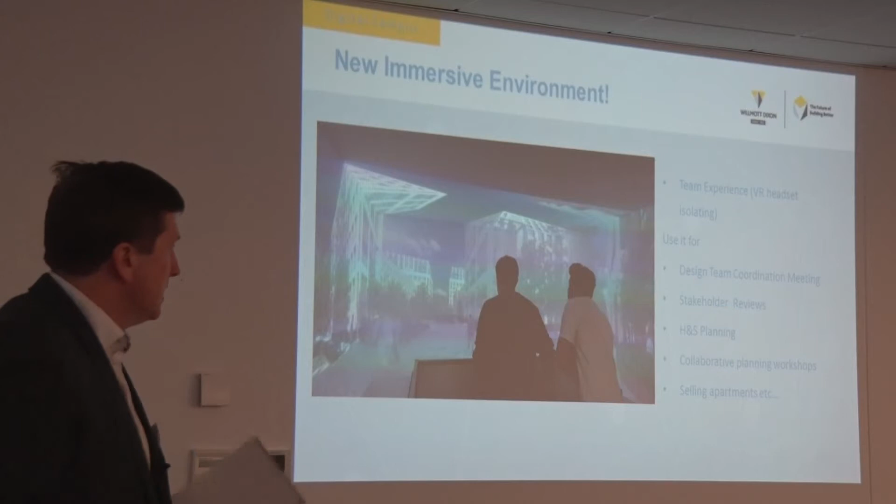These immersive environments are proving really, really useful, and we can see it with stakeholders, we can see it with our teams, but we're now seeing what else we can use it for - using it for collaborative planning sessions and things like that.